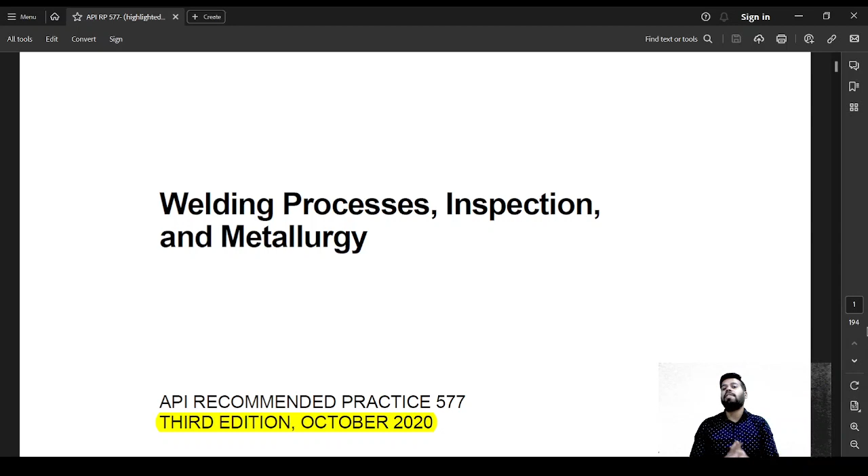So we have generally seen ASME Section 9 because this document is going to refer a lot to ASME Section 9, but this document will have various other features also. This document will tell you what should be the quality control process. It will also tell you what are some non-destructive examinations that you can do, which non-destructive examination is going to be better for what kind of discontinuities, how to verify the WPS, how to verify the PQR. All of these things are laid down by 577. So mainly the inspector is going to refer 577 while doing welding inspection, and sometimes he might need to refer ASME Section 9 where API 577 tells you to refer ASME Section 9. Okay, so let's go ahead with this document.

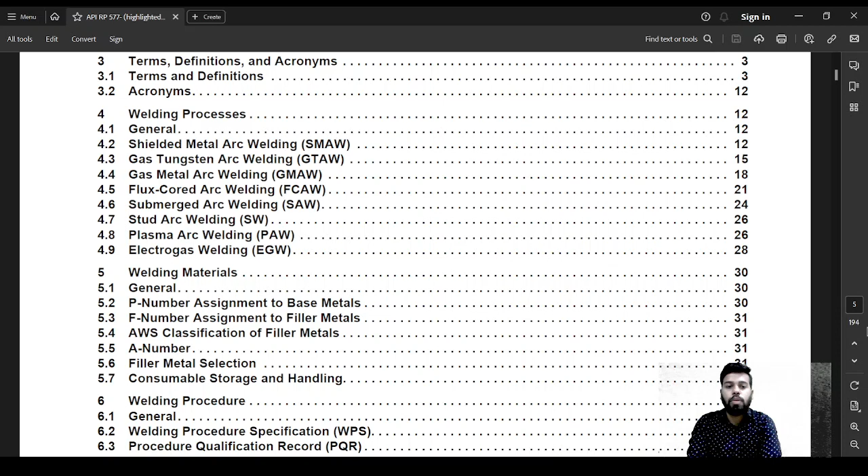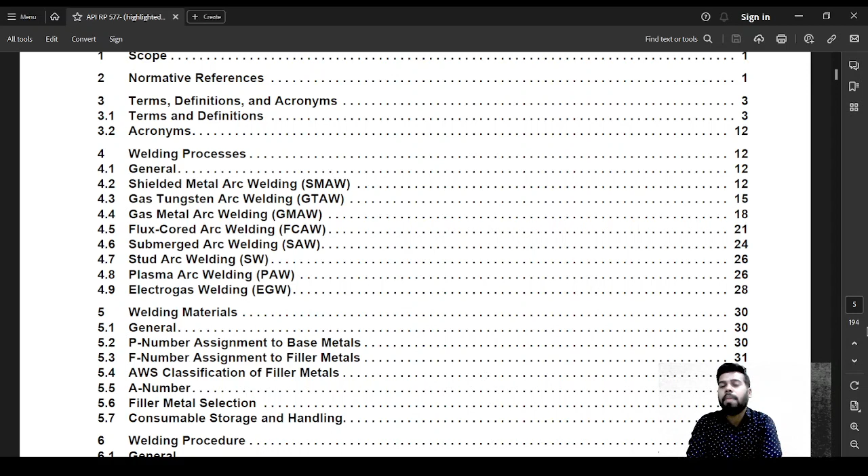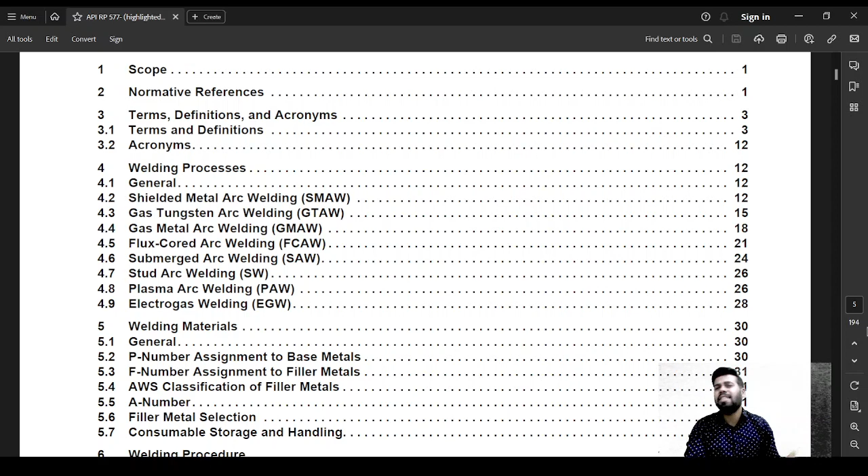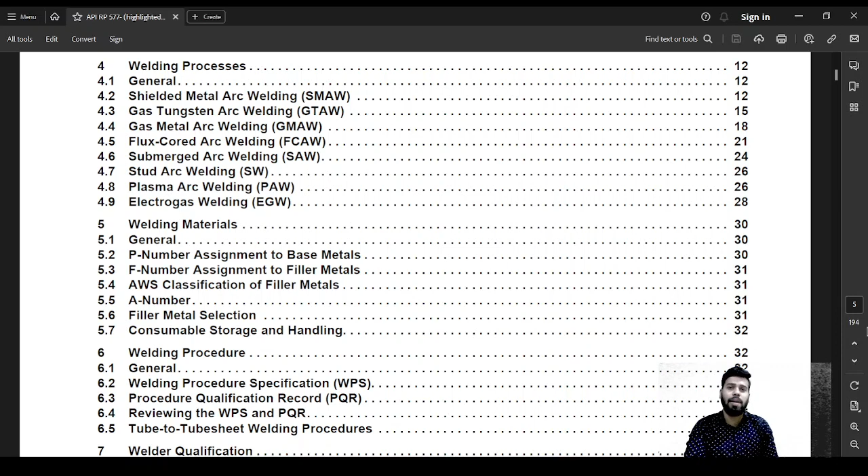So again, this is a bigger document. It's approximately 150 or 160 pages, and then you have some annexes attached to it. It's very simple. Just a normal welding scope is given here. What are some welding processes, what are some non-destructive testings and all of those things. So the first section is scope, second section is references, third section is definitions. These three are always common in all kind of documents. Then fourth section is welding processes. Different kinds of welding processes are listed out, with a short description and some advantages and limitations.

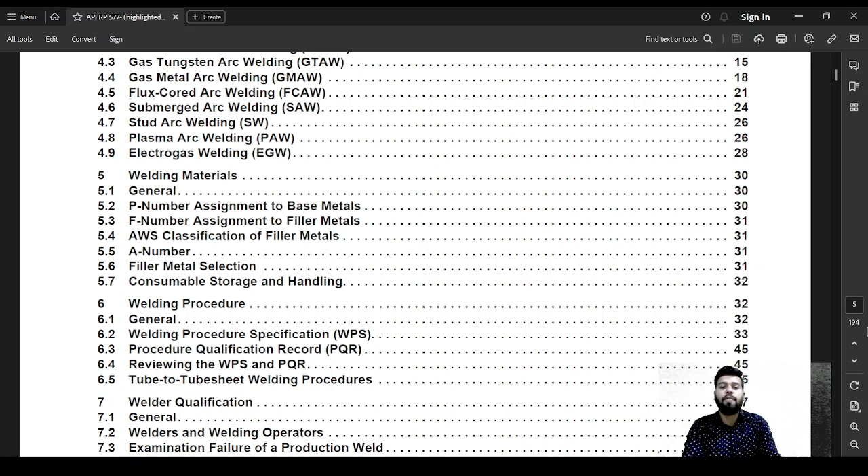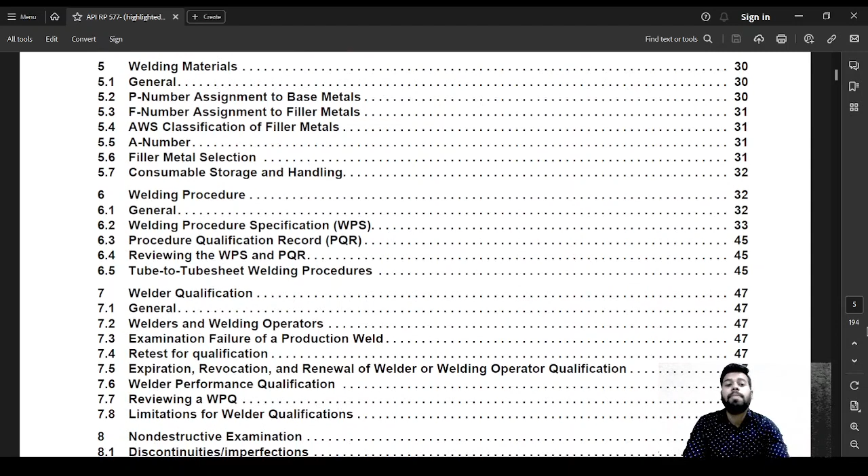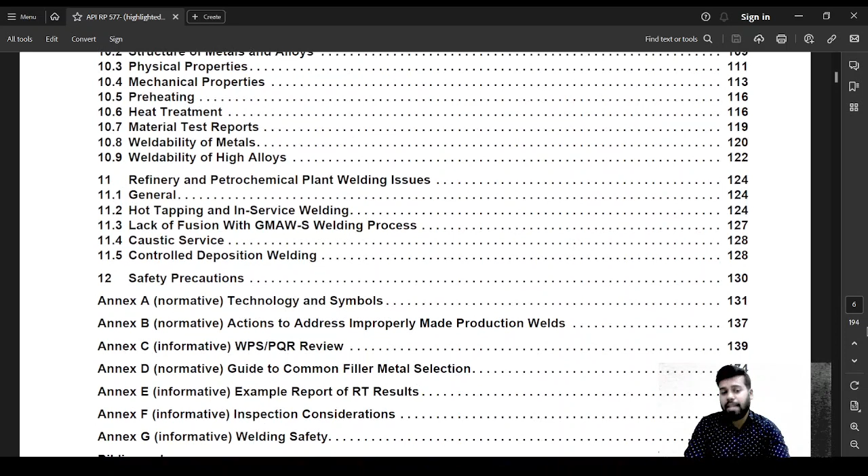Then section 5 is going to be welding materials, the general welding materials, what is P number for base metal, what is F number for filler metal. This we have already seen when we were talking about ASME Section 9. Then welding procedure, welder qualification, non-destructive examinations, welding inspection, metallurgy, and refinery and petrochemical plant welding issues. Then in section 12 you have safety precautions, and then you have annexes. There are approximately 7 annexes available here. Okay.

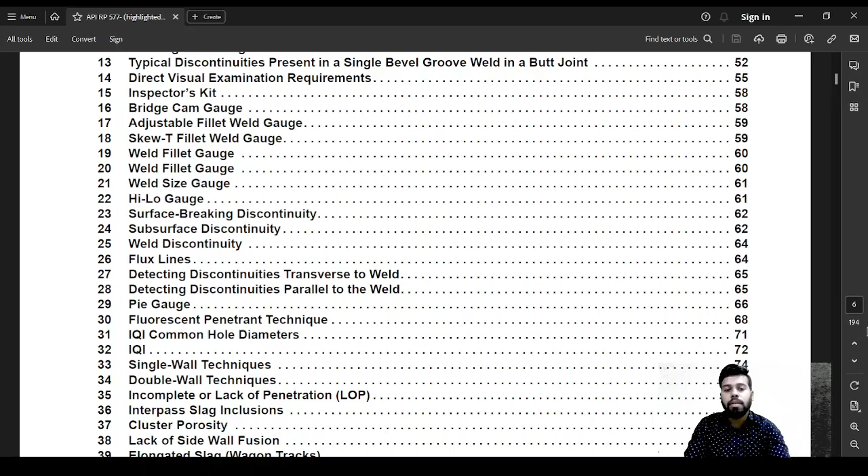So let's go on with the scope. This recommended practice provides guidance to the API authorized inspector on welding inspection as encountered with fabrication and repair of refineries and chemical plant equipment and piping and pipelines and other related industries. So this is used by the API authorized inspector generally in chemical or petrochemical industries. This authorized inspector can be a tank inspector, a pressure vessel inspector, or a piping inspector. This recommended practice includes a description of common welding processes, welding procedures, welder qualifications, metallurgical effects from welding and inspection techniques to aid the inspector in fulfilling their role implementing API 510, 570, 653 and 582.

So this is just a document that will tell you how to do inspection. This document is not intended to replace the certified welding inspector, which is generally given by AWS CWI or TWI CSWIP. It is just guidance given to the inspector on how a welding operation needs to be inspected. So the level of training obtained from this document is not a replacement for the training and experience required to be a certified welding inspector under one of the established welding certification programs such as AWS CWI, or Canadian or European equivalent schemes such as CWB, Canadian Welding Bureau, CSWIP, PCN or EWF.

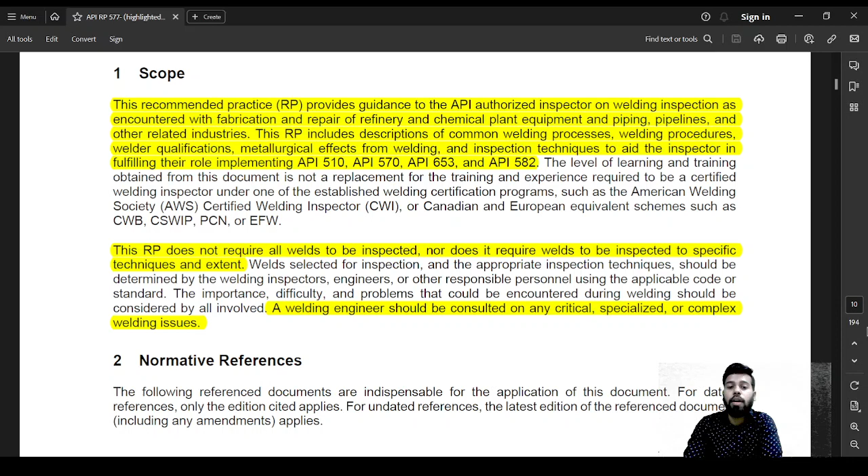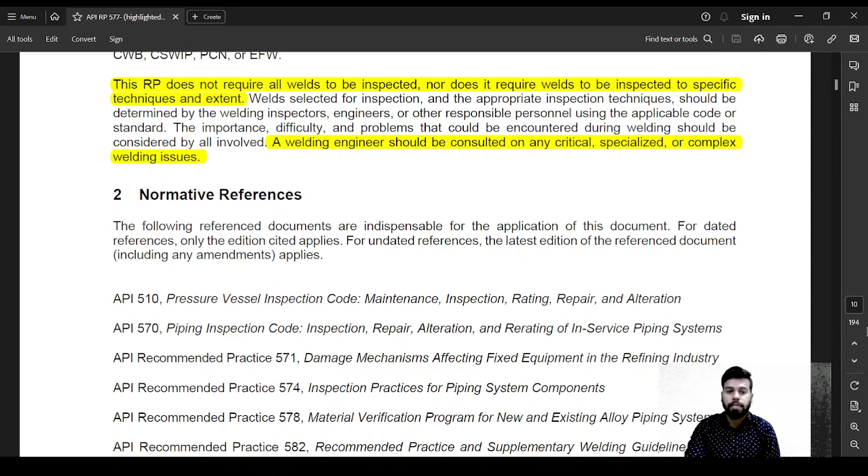This recommended practice does not require all welds to be inspected, nor does it require welds to be inspected to a specific technique or extent. A welding engineer should be consulted on any critical, specialized or complex welding issues. Then you have normative references. These are the references that are used to make this document. Just read them.

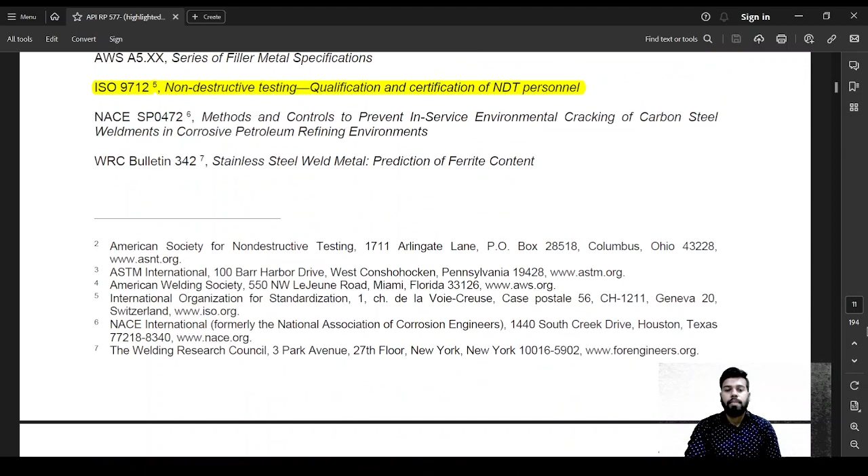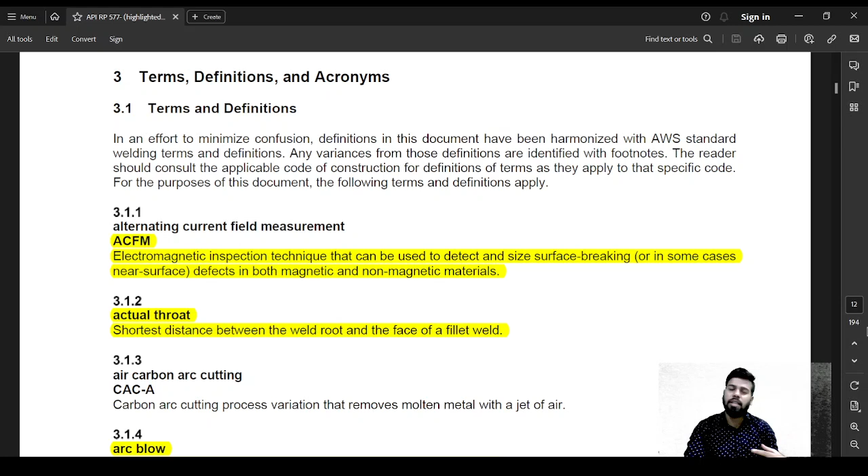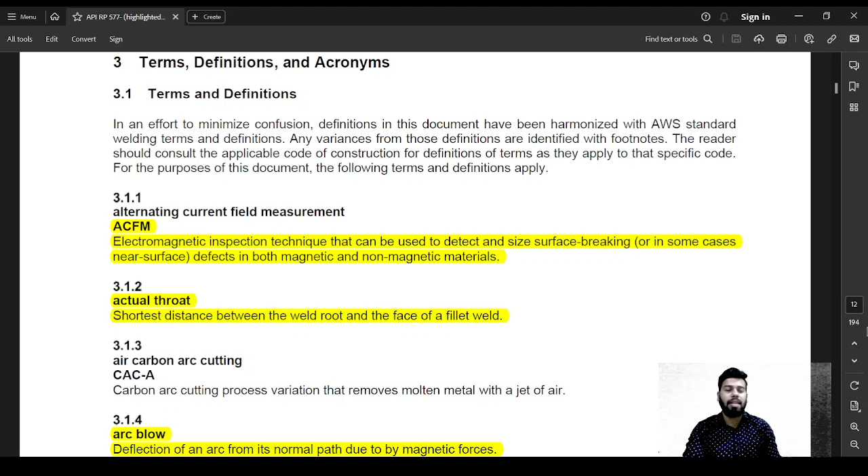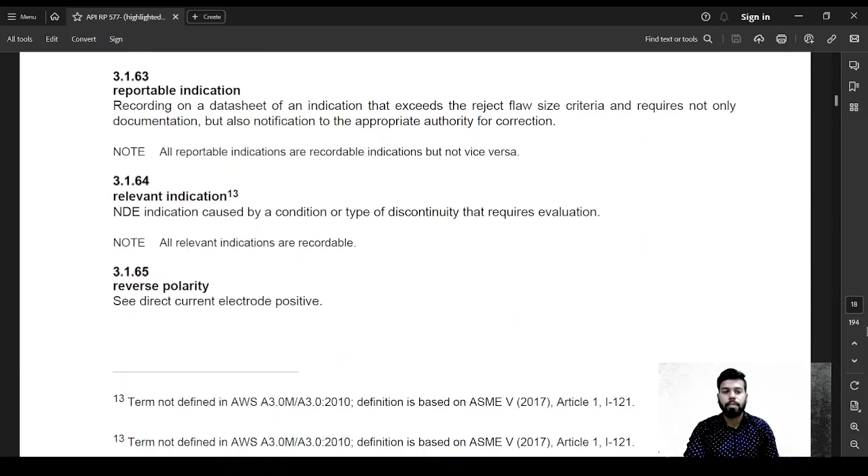Next is terms and definitions. We already know some terms and definitions. These are common with the entire API authorized inspection references. They are generally the same. It has to be read at least once to understand. If some of the definitions you don't understand, generally read once and that's about it. Then you have acronyms, various acronyms that are used throughout this document.

So now we have seen that there is ASME Section 9 that is generally used for welding qualification, welder qualifications, to make a WPS, a PQR, a welder performance qualification. It tells you various variables about welding. Some are essential, some are non-essential, some are supplementary variables. And API 577 is recommended for the inspector to review any welding operation done in repair and alteration for chemical or petrochemical industries. The authorized inspector can be a pressure vessel authorized inspector, that is 510, a tank authorized inspector, that is 653, and a piping authorized inspector, that is 570.

The first three sections are relatively very easy. The first section tells you the scope of this document, the second the references it uses, and the third the various definitions and acronyms used throughout this document. In the next video, we'll go into the meat of this recommended practice, section 4, different kinds of welding processes. Mostly 4 or 5 welding processes are widely used, but this document lays down the various types of welding processes, their brief nature, their advantages and limitations, and their working principles. Okay, so in the next video, we'll see section 4, different kinds of welding processes.